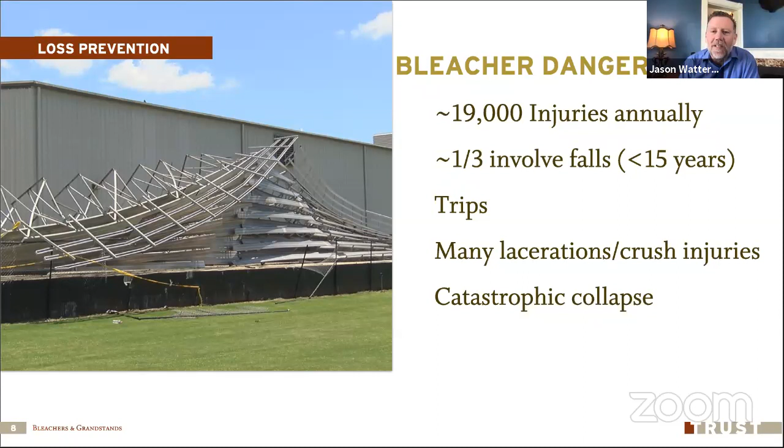We see trips, we see lacerations, we see people getting pinched and crushed and all kinds of things like that. And then there's that catastrophic thing when we have a collapse happen.

Just the terror that would happen, and how do you respond to something like that? We have thousands of people or hundreds of people getting injured, and we've got to deal with that. We don't want that to happen, and so we need to actively participate in the safety and risk management surrounding our bleachers and grandstands.

So I say bleachers and grandstands, and we ought to talk about what the definition is. In a standard that I'll reference here in a minute, it says that bleachers are tiered seating supported on a dedicated structural system and 2 or more rows high, okay?

And then it says in the same standard, grandstands are exactly the same thing. I'm reading the two definitions and I'm going forward word by word, and I'm like, this is exactly the same thing. And that was their intention. In the standard, under bleachers, they say see grandstands, and under grandstands, they say see bleachers.

Most people have a perception though that grandstands are bigger. They are our arenas around our rodeo venues or something like that. And we think of a bleacher as being something that's out at the ball fields, you know, that 2 or 3, 4 tier bleacher that people sit on to watch the Little League games.

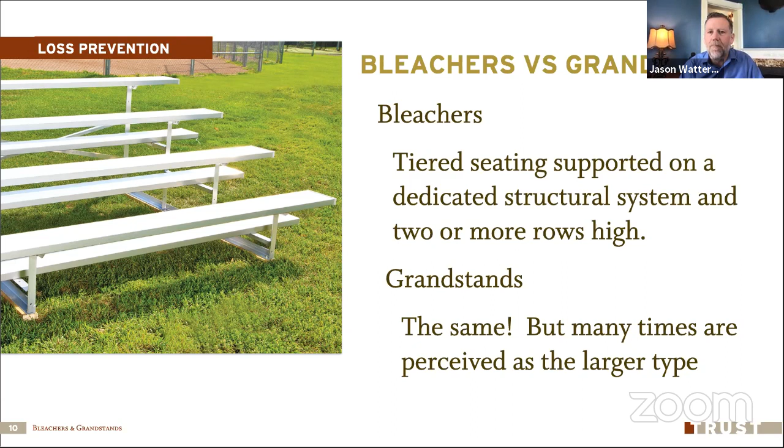But we can use these terms interchangeably when we're talking about the standards that pertain to this. So bleachers can be fixed or portable.

Many of you may have some that are on wheels. You can hook onto those with a truck or a tractor and drag those around to a different venue where we want to use those in other places. Some are fixed. Some have been there for generations. Some may be close to 50, 60, or 100 years old.

And some are permanent, some are temporary. I throw a picture up here of an Olympic event. This one looks like Deer Valley during the Olympics. I worked for SLOC in risk management there, and for all of these venues, we built all the outdoor venues.

We built giant grandstands. They were built with a gigantic scaffold structure underneath there, and then we put bleachers and seating on top of those, and then we put tens of thousands of people in those seats. I can tell you a lot of stories about grandstands and some of the challenges that we had in putting these in place, but we don't have that much time.

Bleachers and grandstands can be indoors or outdoors. We're going to focus a lot more on outdoors because that's where most of the exposure that you have is in your facilities. It's outdoor bleachers or grandstands.

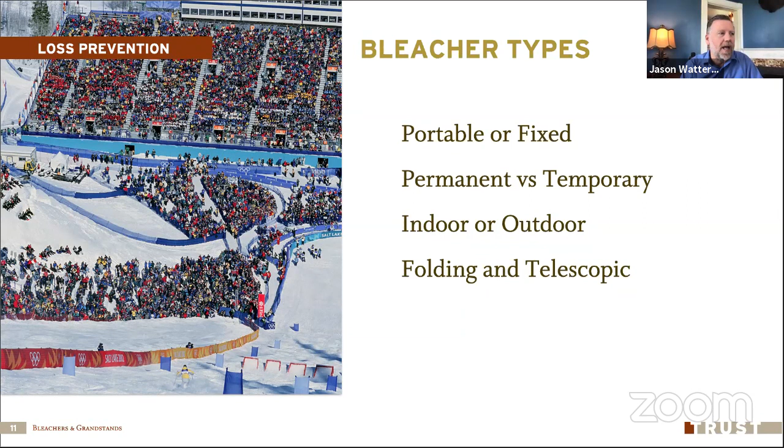They can be folding or telescopic as well. Just think of your old high school gymnasium with those expandable bleachers that would fold out, and then everybody could sit there. All right, here's just a couple more pictures.

He says, 'Are you the guy that shut down the bleachers, the grandstands at the Olympic Park?' I said, 'Yes.' He says, 'Where are you?' 'I'm at the Olympic Park.' He says, 'Good. Stay there. Meet me at the grandstands in 5 minutes.' He was pretty excited about things. And I walked to the top of this 200-foot fall, roughly 200.

He says, 'What are you talking about?' And I walked up, and we had the backrest, the guards on the back side that keep people from falling off the back. I walked up to one on the edge, grabbed hold, lifted it up, turned around, and reached out to hand it to Fraser. I said, 'This is what I'm concerned about.' He says, 'Oh, that's a problem. We need to fix that.'

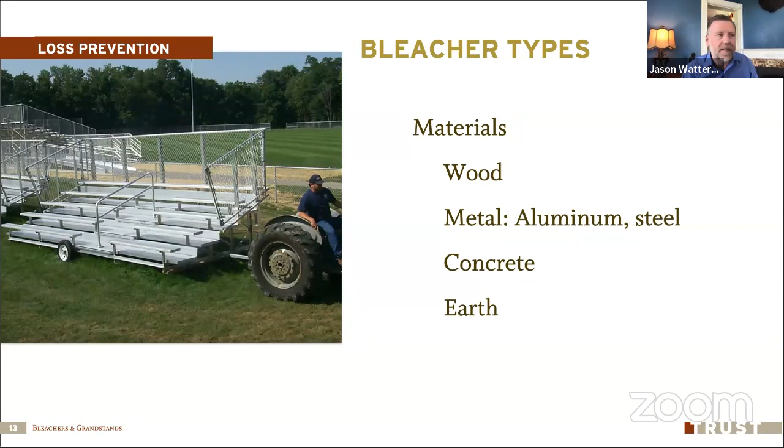Speaking of standards, there are a couple of standards that pertain to bleachers and grandstands. The first is the ICC, the International Code Council. It's also an ANSI standard, American National Standard, and it dovetails with our building codes. This is kind of an addendum to the overall building codes, but a lot of these standards really come right along with the building code, and I'll keep going back to that.

The second standard isn't necessarily legal. It's more of a suggestion from the Consumer Product Safety Commission, and it provides guidelines for retrofitting bleachers. So if we have an old set of bleachers, what can we do to make them safe? It gives us some guidelines for that. It hasn't been re-released for a significant amount of time, so it's kind of dated.

Whereas the ICC 300 standard was re-released in 2017. I would love to send everybody a copy of that standard, but it's copyright protected and they're pretty tight on it. I can share parts of that, and that's what I'll be doing in this presentation today. But if you have exposure with this, it costs about $30 exactly.

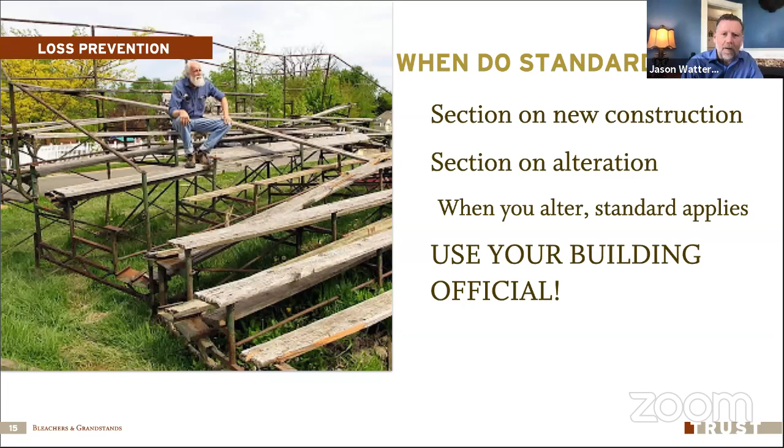Just a reminder, I'll say this several times: many of you will have a building official who works for your organization. If you're a city, use your building officials. They know the code, handrails, egress, and all those things, or they have the capability of finding that out, and they may already have access to this standard through their normal work. So use them. If they say, 'I haven't done a lot with grandstands and bleachers,' tell them we need you to have that standard, we need you to know what it is, not only for our facilities but others. Use those building officials to your benefit.

So what do the standards require? Let me tell you, there's a lot of stuff. Here's the standard right here. There are a lot of pages in it, and I'm just going to give the 10,000 foot level—well, some of it's a little more detailed than that, let's say a 1,000 to 5,000 foot level.

But once again, go back to your building official when it comes to the real details, like the number of exits or how wide our aisleways need to be. Let's make sure we're coordinating with the building official for that.

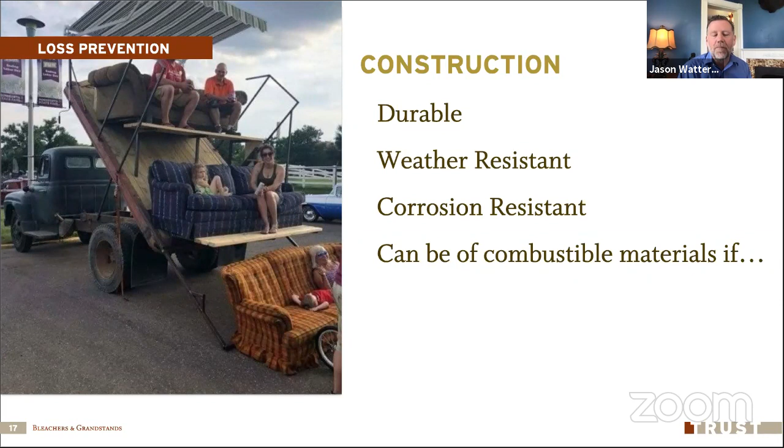Some of the things it requires: construction to be durable, weather resistant, corrosion resistant. It particularly calls this out if we have an indoor pool with a viewing area with bleachers—those need to be particularly corrosion resistant because of the amount of chlorine in that room. They can be made out of combustible materials, but there are some specifics to that which I won't go into detail on. Basically, you can have wood bleachers inside a building, but there are some caveats, and I'll send you back to your building official on that to make sure we've met all the requirements.

Our bleachers need to be on a sturdy foundation. What does that mean? Well, it depends. Some bleachers are designed to be freestanding, set out on sturdy ground. Some are designed to be anchored to a foundation. Some need significant footings and foundation. Whatever it is, it needs a solid base. The standard says they need to be anchored or ballast—meaning either anchored to the ground or weighted so they don't tip over. I've actually seen a few sets of small portable bleachers that were not ballast appropriately.

If you were the only person and climbed up to the top tier of one of these 4 or 5 row high bleachers, sat on top, it would actually tip over. So one really important thing when dealing with bleachers is to look at what the manufacturer requires. If the manufacturer says it needs to be anchored, it needs to be anchored. If they say it needs to be ballast with so many pounds of weight and certain types of weight, we need to do that. We need to consider our site—look at the slope, the soil compaction, water issues, anything like that when we decide where to put these bleachers.

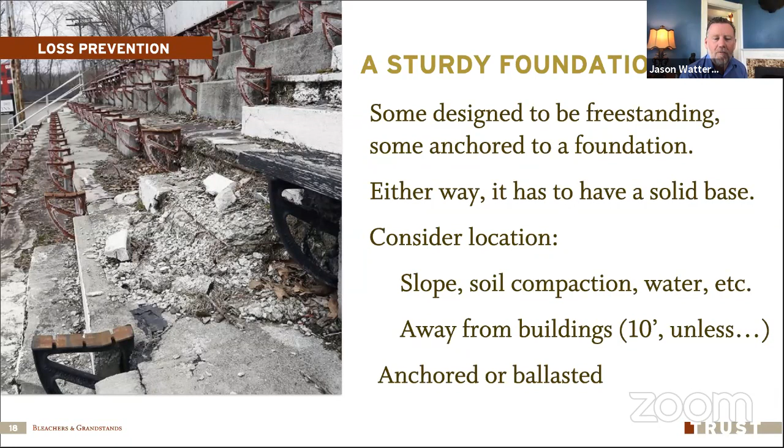I've seen several facilities where the bleachers were put in a bad location where they could physically tip over, or they put people in positions where it would cause them to trip or fall. So look at the location.

Under the bleachers, can we do anything under there? The answer is no, unless it's approved by your fire code official. That means we don't want any combustible stored under there, no cooking, no little cook shack underneath just because it's an out-of-the-way place. Because if we have a fire under a whole bunch of people in bleachers, that's a really bad thing. So there are specific requirements about doing anything under the bleachers. Unless you have approval from your fire code official, don't be doing any of that kind of stuff under there.

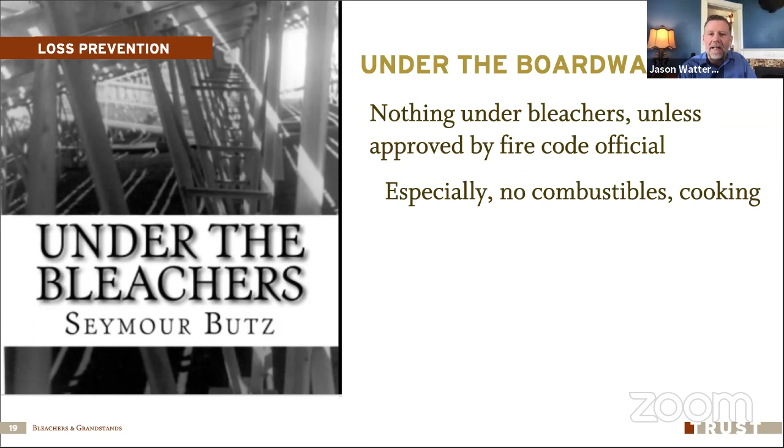Keep our bleachers away from buildings, unless your building official approves having those connected or within less than 10 feet from our grandstands or bleachers.

Our occupant load, we don't want to overload this grandstand. So there's a requirement in the standard to have a live load rating of 100 pounds per square foot. If it's a press box up on top, it needs to have 50 pounds per square foot. There are guidelines on how to count the number of people, and that is 1 person per 18 inches of length of bench.

That's another Olympic story. SLOC had decided that we could have these little overhangs that were 9 inches long on each end of each row of seats. With those 9 inches on each end of a row, they were half cheeks, and so between those two 9-inch overhangs, we could sell one more seat and make that much more money off of it.

When we start talking open areas, if we have a reviewing stand, an area that doesn't have fixed seating but is an area where we can stand, we need 5 square feet per person. If we have movable chairs, say we've got a deck and we're bringing in some folding chairs, that needs 7 square feet per individual seat.

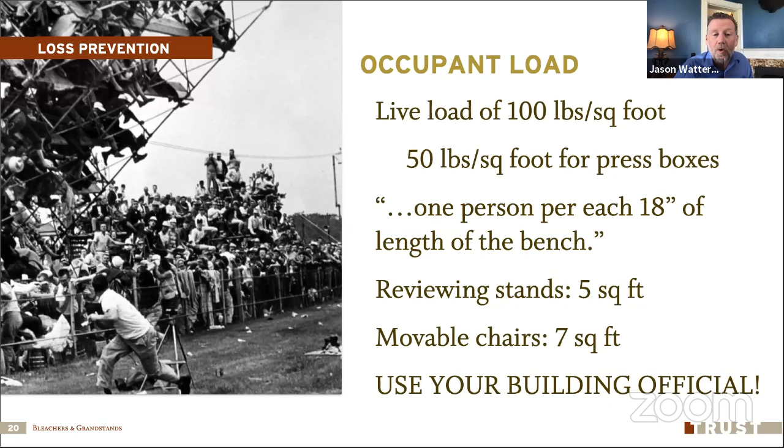Once again, use your building official on these things. In the standard, there are some calculations that have to be made for not only the live load, but the horizontal loading and all of the different components of the bleachers and grandstands. This is just to help convince you to use your building official.

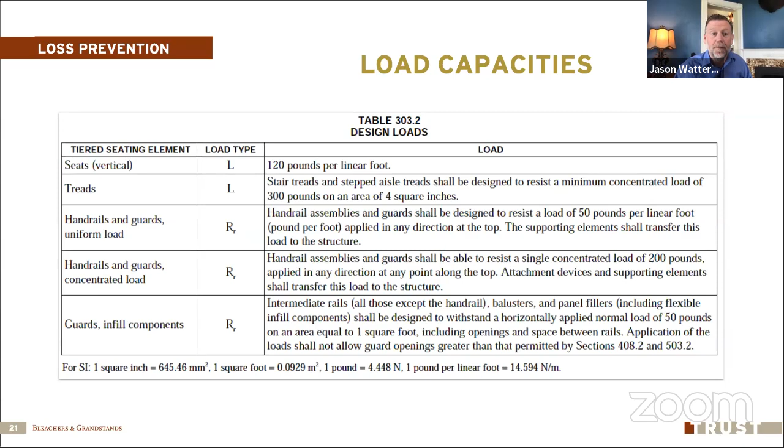Egress. We need to be able to get people safely in and out of our bleachers. In some situations, like a little three-tier high bleacher, I'm not too worried about getting people in and out because I'm about 2 steps away from being away. But if I have a grandstand with several thousand people there, and some bad event happens—a fire, or a bad person comes and does something bad—how are we going to get people out of there in a hurry? We have to provide safe egress plans for that.

So once again, follow the code. The standard ties right in with the building code. The width and number of exits are based on the occupancy. When we talk about that 18 inches of horizontal seat space, that's how we count bodies, how many people we can get in there.

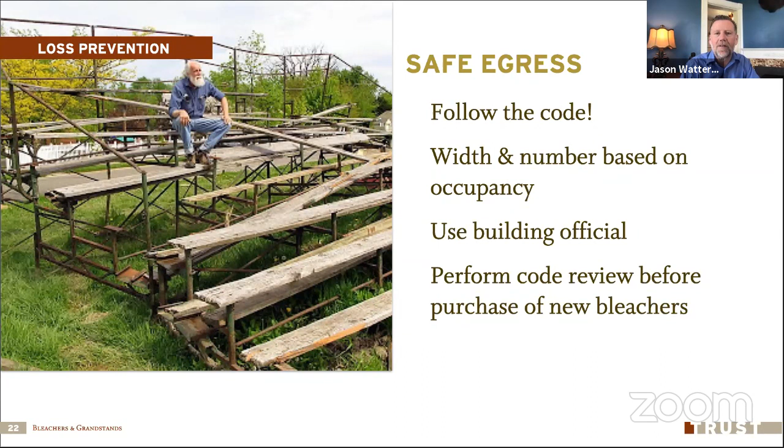Prior to installing or modifying the bleachers or grandstands you have, sit down and go through a code review and say, how are we doing? Because it's not only the number of exits, but it's also ADA access and egress.

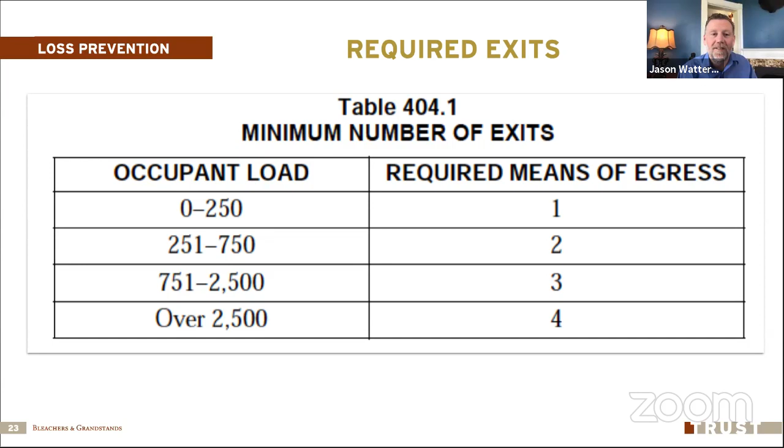Here's just a quick idea of the number of exits that may be required. For 0 to 250 people, we're looking at 1 egress path. If we're up over 2,500, we're looking at least 4, and there's a lot that goes into doing that. So once again, just a reminder to get your building official involved.

Okay, let's see, the next one is ADA accessibility. The Americans with Disabilities Act is designed to provide access to everybody regardless of their ability to do certain tasks.

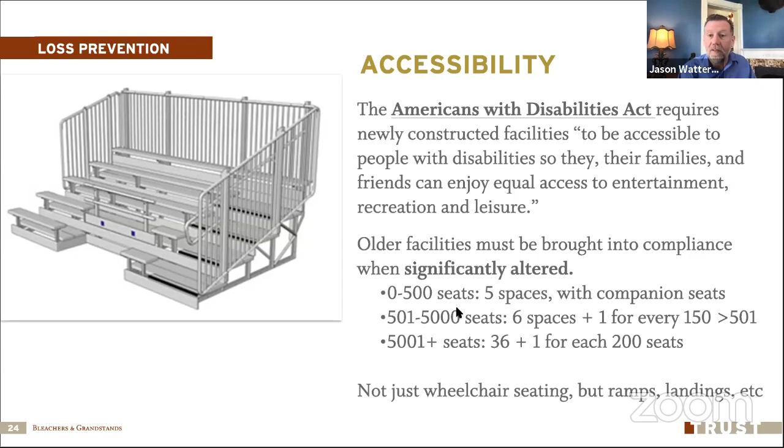It gives some guidelines in there. For 0 to 500 seats, we need to have 5 spaces for wheelchairs. For 501 to 5,000, 6 places, plus 1 for every 150 people over 500, and on and on. Not only do we need to have wheelchair seating, but we also need to have ramps, landings, and things that comply with the ADA as well. Once again, bring your code official into this mix.

Let's see, open spaces at floorboards and seat boards. As you look between your seats, if you can see down below, you're probably not in compliance. We need to have an opening that is less than 4 inches in diameter. So if I have a 4-inch sphere, think of a round ball, that should not be able to pass through any opening below the seat.

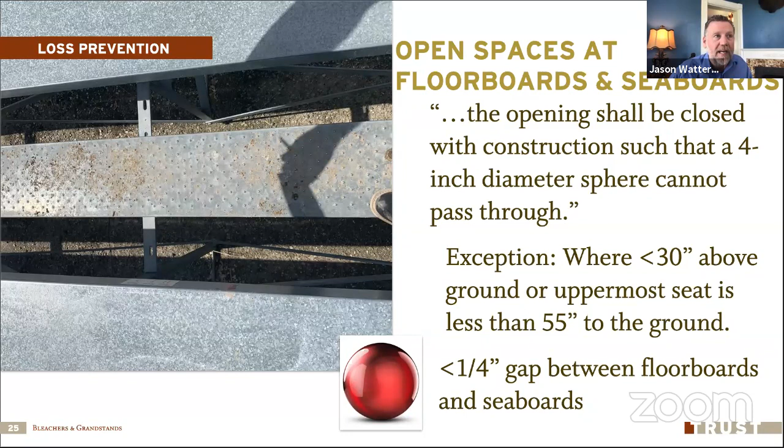Except in areas where it's less than 30 inches above the ground. So that first row of seating, we don't have to have that closed up, but above 30 inches, I have to have that. Now there is an exception for some of these smaller ones. If the top seat is less than 55 inches to the ground, then we don't have to meet that requirement. There is one other requirement here, and that's the gaps between the seat boards and the floorboards should be less than 1/4 inch, so we can't get fingers and toes down into those things.

Handrails. Anything above 30 inches high needs to have handrails, with that one exception that we talked about. Once again, these handrails should not be able to pass a 4-inch sphere. They cannot pass through. They should be 42 inches in height, plus or minus. Existing bleachers that we have should not be less than 36 inches in height.

The material that we use to close in these handrails, as you can see in this picture, this one does not meet the requirement of the standard. The materials that we put in there to fill that in need to be such that it restricts people from climbing up. We don't want kids to climb up this and fall over.

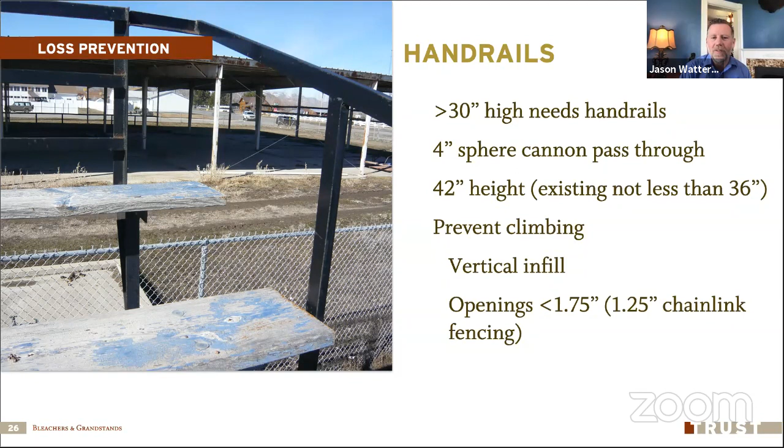So some examples are vertical bars, so there's really no cross piece for you to get a foothold to climb up. Other things would be chain link fencing, and even though that's not the prettiest stuff that's out there, it works really well. Going back to this other slide, the openings in that chain link should be 1.25 inch chain link fencing. As we look on a square, if we turn that chain link on its edge, it should be 1.25 inches. The standard says openings should be less than 1.75 inches on these sides.

Here's a big thing to remember as well: don't forget the manufacturer's guidance. If you have bought a bleacher system, that system has guidance from the manufacturer. They will generally send an owner's manual along with that says, here's how you have to use our system.

That's the standard that we live by, in addition to, because they're going to meet the ICC standard when they sell a new piece of equipment in almost all situations. They pretty much need to live by that to be able to sell that product. But they may have something specific. It'll tell you you've got to weight your equipment, or weight your ballast on the bleachers. You have to anchor it in a certain way. There's certain inspections that you must perform.

You may need to torque bolts to a certain specification. Go by what the manufacturer says. And if you can't find the owner's manual for that piece of equipment, contact them and get it. I guarantee they'll send you one, because they want you doing this right. They don't want to get sued because something went wrong with their product, just as much as you don't want to get sued because something went wrong at your park or your fairgrounds.

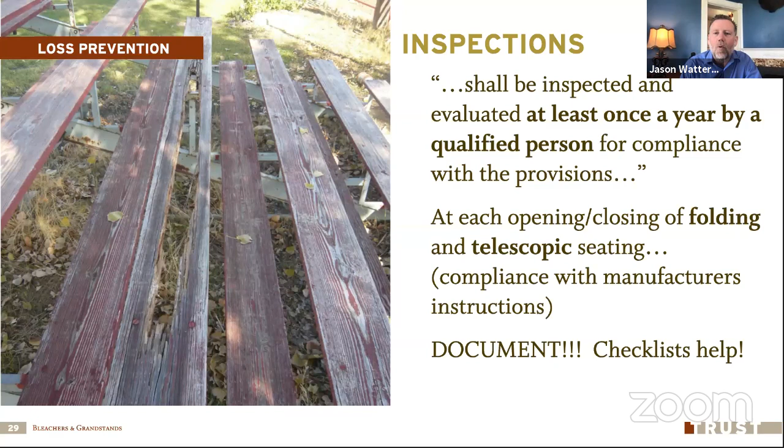Well, there's one important thing in this requirement. It says that it needs to be inspected by a qualified person. What the heck is a qualified person? Well, in the standard, it says a professional trained in the proper and safe use, operation, and repair of bleachers, and is knowledgeable in the requirements of this standard.

Well, you got to ask yourself, do we have somebody in our organization that fits that bill as a qualified person? If not, you either need to get somebody trained up to do that, or you need to bring somebody in who is a qualified person.

Okay, and I just wanted to run through some things to watch for as we go out and look. As Doug and Brent and myself go out and we walk through your facilities, sometimes we see some really scary things. There have been a few that we've seen over the years.

Doug and I went on one years ago, and I was literally scared for my life walking on this grandstand. We were 30 feet in the air, and there was literally one 2x6 that was not in very good shape that you would walk on. And I looked down, I'm like, oh my gosh.

Kids could fall through this. And the person showing us the grandstand, I said, I'm afraid we're gonna have kids fall through here. And he said, we've had a couple. And by the time Doug and I got through looking at these grandstands, we were unanimous, and we just said these need to go. These are unsafe, and it's not a reasonable risk for you to be putting yourself into as an organization, or putting the trust membership at risk because of the real overt risk of this structure.

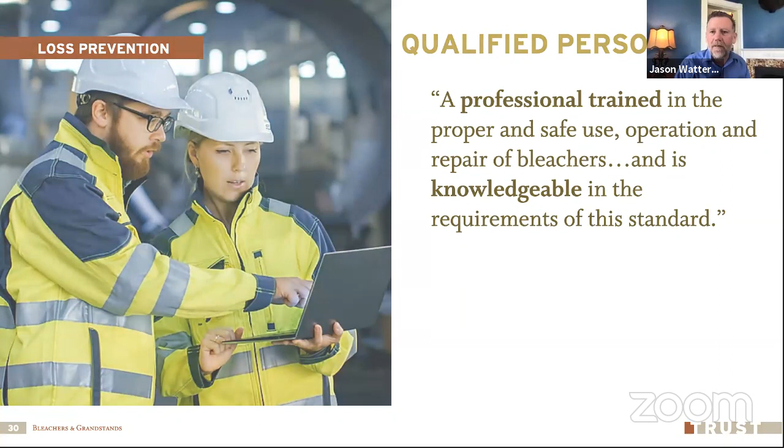I gotta move along here. I'm doing ID and inspection tags. I don't have a picture of an ID and inspection tag because I couldn't find one. I was looking and looking through my stuff, and I looked online and couldn't find one. I forgot to ask Brent and Doug about it, but I'm looking at Doug and he's shaking his head, he didn't have one either. Each of these bleachers should have a tag on there that says who the manufacturer is, when it was installed, the seating capacity, who inspected it, and the date of that inspection. That's an action item for all of us. As I dove back into this standard, it'd been a number of years since I read it, and I was like, huh.

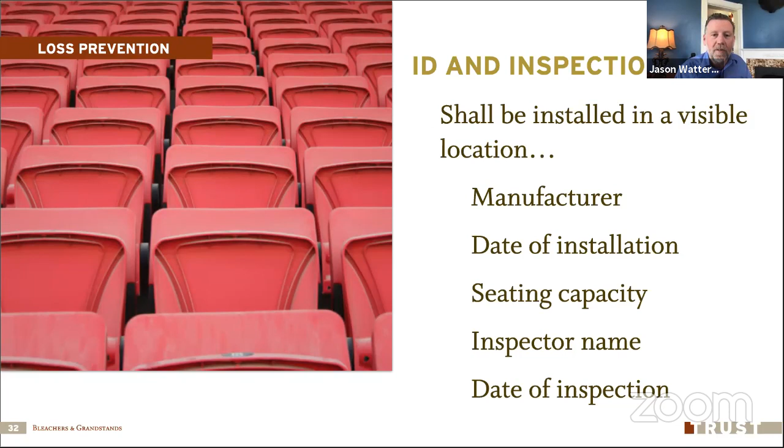And maybe that was a 2017 add, or it may not have been. I was like, that's something I've got to look at more as I'm out doing risk assessments on these things - do we have those tags in place? That can help us get in touch with the manufacturer and give us some of that key information we need to know.

Okay, we should be looking for damage. When you get out there, walk all of the bleachers. I know it takes a while to walk around through the entire rodeo arena, but walk all of those, because that one bad board, that one nail or bolt sticking out, is not going to be readily apparent from the other side of the arena. Get out there and walk under those bleachers.

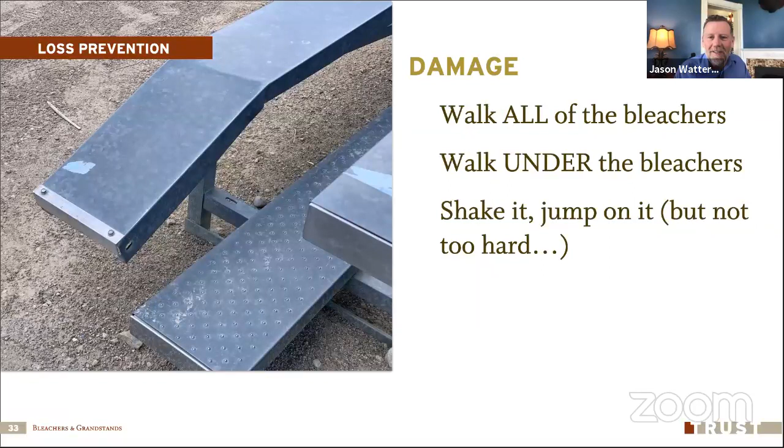When we do those inspections, we need to be looking at all the components. Shake it, jump on it. But of course, don't jump too hard - we don't want you. I think if Doug and I would have jumped on the boards on that one we were at, we would have been 30 feet down. But go out and test this, because you're going to be putting a significant load on that, and it's important. You're putting thousands of your residents on this.

Look for laceration hazards. Can you see the laceration hazard in this picture? It may not be readily apparent, but right where these two pieces of metal come together, it was really sharp, and somebody was pretty significantly lacerated, cut on this bleacher. So take a look for things like that.

Do I have sharp edges? Do I have things sticking out that people can walk into? Just remember how people are going to be using this. You've got a crowd and they're walking along shoulder to shoulder. They're not going to see that piece of angle iron sticking out, and they're going to bash their shin on it, and then it's going to be your fault.

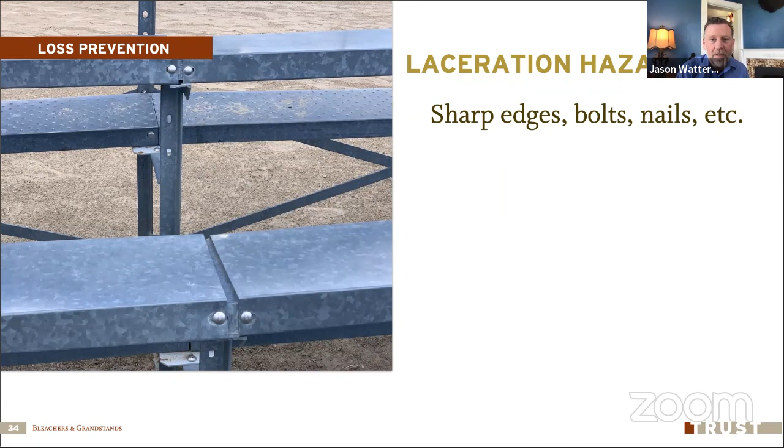Okay, look for electrical issues. I've seen some pretty scary stuff in some of our risk assessments, where people have done some creative electrical work and wound electrical wires around our metal grandstands. What happens if the insulation gets broken on that, and we suddenly electrify our grandstands? How big of a disaster could that be?

So if there's some question about your electrical system, use your building official. Get out and inspect these things, particularly if people are coming in and using our facilities. Sometimes they're like, yeah, we're going to take this 240 volt extension cord and drape it up through the grandstands where we've got our PA system or whatever. Look at those things and be aware of what's going on.

Ask yourself the question, can my bleachers or my grandstands cut it? Are your bleachers designed for the type of use that you intend? If you're hosting rodeos and you have rough stock, just a regular grandstand probably isn't going to cut it. What type of fencing do we have in place that can handle a 2,000+ pound bull out there, or bucking broncs that are trying to jump up into the stands?

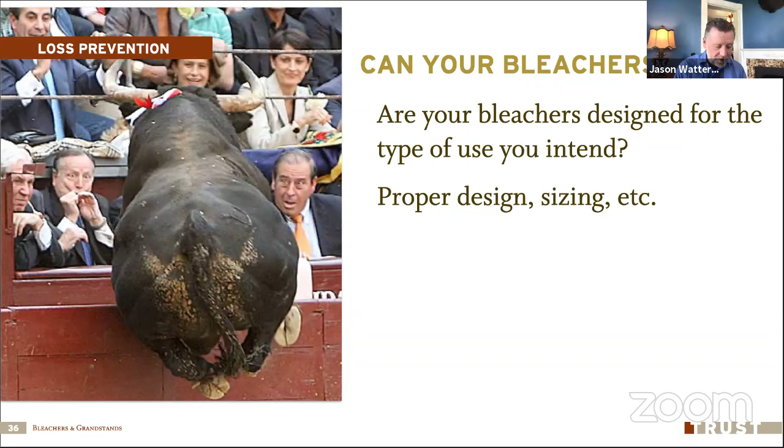And sometimes it comes that our stuff needs to be replaced. It's been there a long time and it's tired and it needs to be replaced. We need to put a plan together to either retrofit it or replace that structure. I know it's hard and it costs a lot of money, but this is important. These people's lives are at stake when we're dealing with this, and not just lives, but they could be injured. We don't want kids falling out of those things, all that stuff.

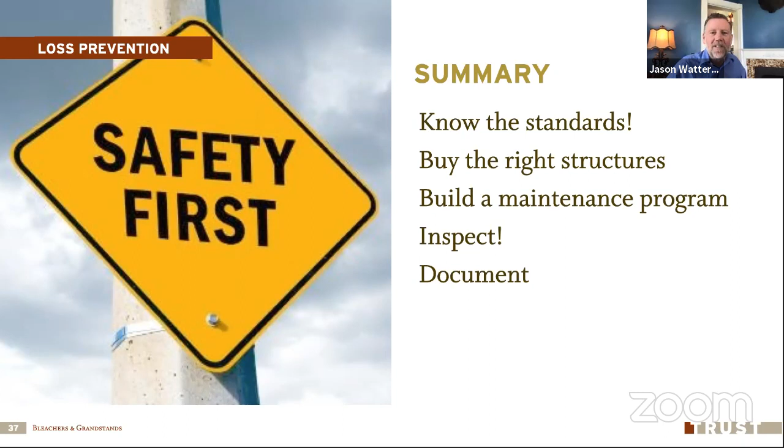Yeah, I have one here actually. Question about if OSHA is going to look for an inspection certificate or a report of some kind. OSHA probably is not going to be involved with this, and the reason being is it's not necessarily involving employee safety unless an employee were injured, or if they're working around there and there was an unsafe condition.

When they talk about qualified person, that's an OSHA term they use, but that's not really what we're talking about here. We're not talking OSHA, we're talking code. OSHA really probably wouldn't ever look at that unless we had employees that were injured or threatened. We're looking more directly at, do we meet code compliance, and are we going to have a safe structure for us out there.

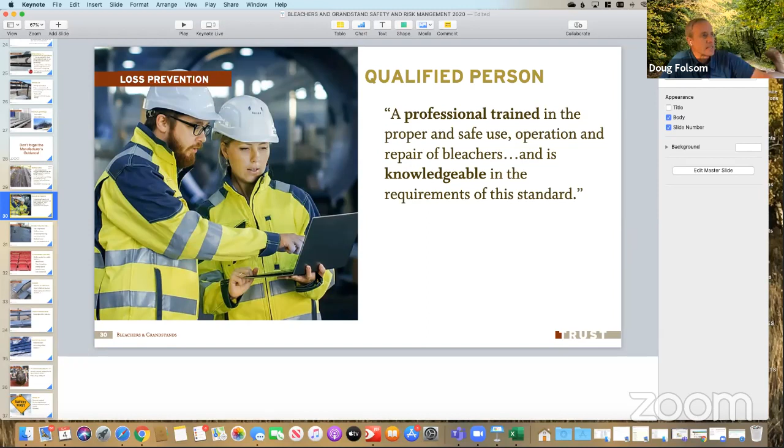Yeah, code compliance is as far as building code and so forth, not so much OSHA code. Lots of times we think of OSHA as being the end-all, be-all enforcer of safety, but it's important to remember OSHA is specifically for workplace safety. And to your point, a grandstand isn't necessarily a work site, it's an entertainment facility.

Just to clarify also, Jason, you were talking about waivers, and I agree with you as a general rule. When people ask us about waivers, I like to say don't count on it, because you never know exactly the circumstances of what injury we may be seeking liability protection from. So until an event actually happens, until someone's actually injured and they bring that claim, will the waiver protect us or not? Well, we really don't know.

It depends on what was the purpose of the waiver. There are some things you're going to have a real hard time waiving liability on. With a grandstand, for example, the facility needs to be maintained in proper condition for its intended purpose. If we let this thing fall apart and then some group comes in and wants to use the grandstands, and we say, well, they don't look too good, sign this waiver and you can use them, we may have a hard time having that protect us because we have a duty, owning that facility, to make sure it's maintained for its intended purpose. So it's kind of a scary thing to think we'll just get people to sign a waiver if we think this is risky. You need to be really careful about that.

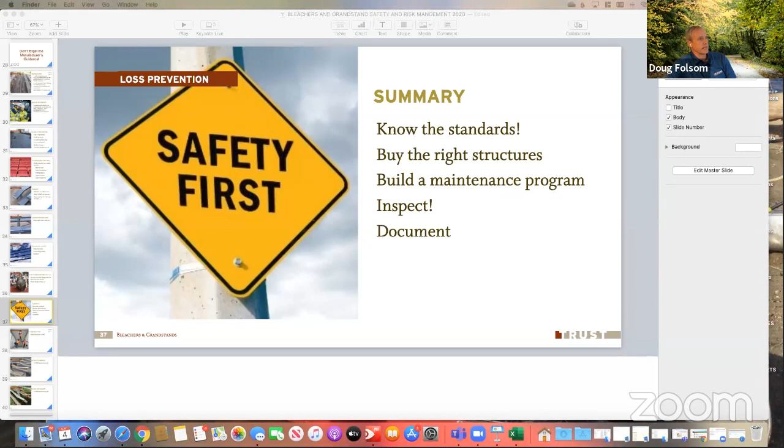Sure, thanks Doug. All right, anything else, Brent? That's all I see. Great job, Jason, great information.

Awesome, well thank you so much, I appreciate that. I see another comment came in. Thanks, Andrew, appreciate the compliment there.